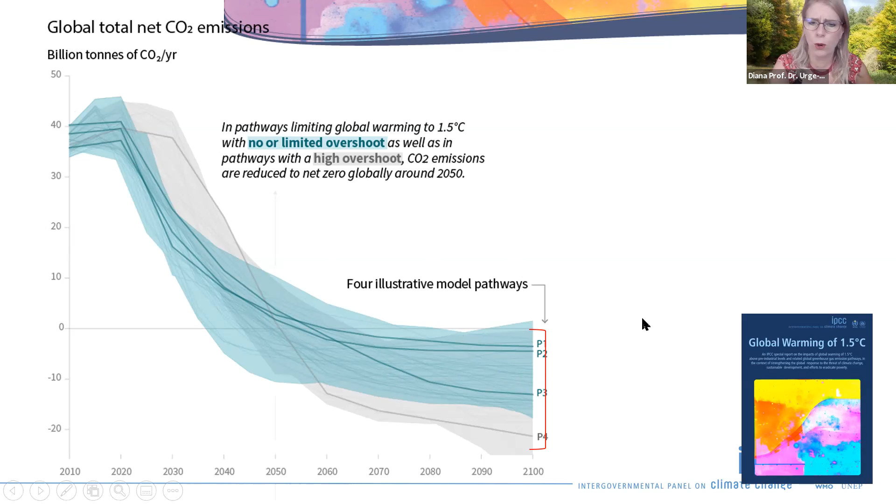Each line in this spaghetti diagram is one emission future. I want you to focus on P1 and P4, but first let's zoom in on P4 - what does it actually look like if we decompose it? The gray is the fossil energy related emissions, orange is agriculture, forestry and land use related emissions, and yellow is BECCS, bioenergy combined with carbon capture and storage.

The problem is there's major concern in recent scientific literature about scenarios so heavily relying on BECCS, because it has issues with biodiversity - ecological concerns - but also costs and many other issues. But if nothing else, just look at the intergenerational justice issue: basically we continue to have fun now while we delegate all these costs to our children, because BECCS has nothing else but costs - it's going to be very costly to capture carbon dioxide from the atmosphere and store it permanently. It doesn't really have much else to offer.

As opposed to that, scientists were asking: can we do something else, not use so much BECCS? And yes, there are alternatives, but not many scenarios out there meet the stringent climate conditions without this enormous amount of BECCS. But definitely what you see is the big difference between the two is basically a free fall in energy demand - not only emissions, but energy demand.

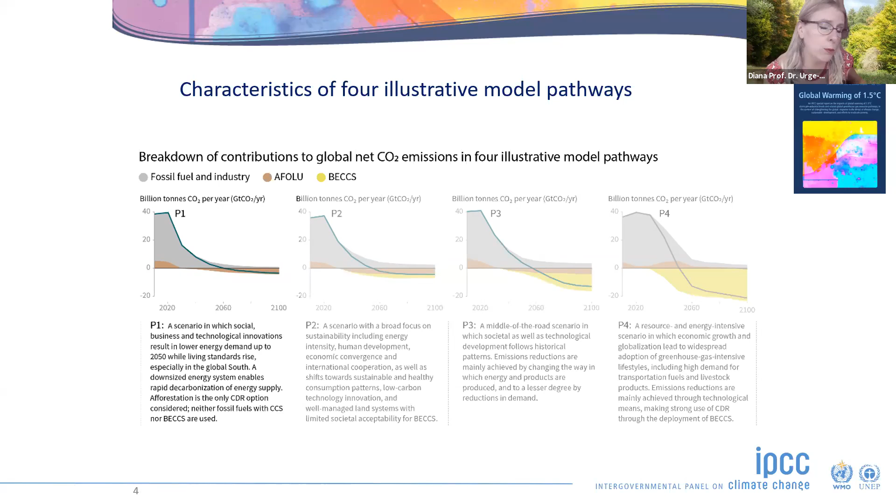So meaning that we cannot meet stringent climate goals without controversial technologies, unless with a very strict and very high attention to efficiency and to energy demand decrease. And we know that buildings, and especially heating and cooling in the EU, is key to this, since half of our final energy use in the EU is for heating and cooling.

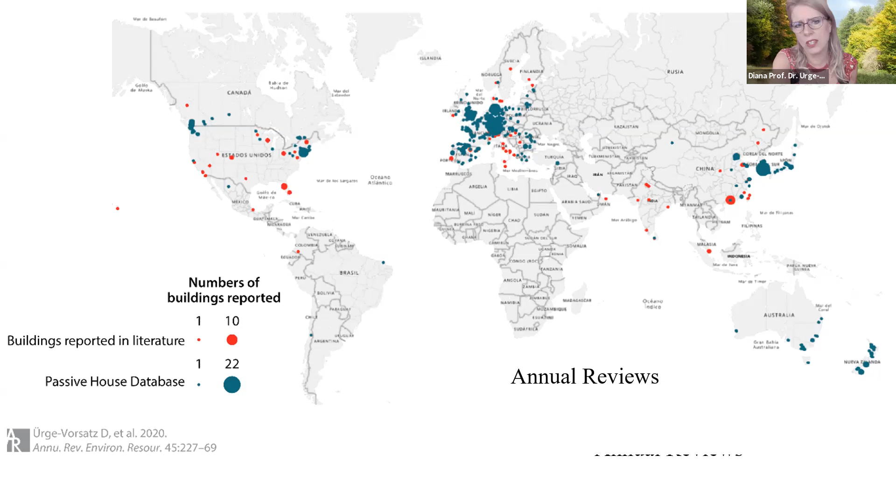The only exception we found, where we have not found yet fully net zero buildings, were commercial buildings, so high-rise office buildings, in hot and humid climates, where a lot of the energy demand is not only for cooling, but for dehumidification, and that has a very large energy requirement, and there it's much harder to do net zero energy buildings. But in all the rest of the world, although unfortunately there are not many examples yet in Africa, based on experiences in similar climates, it's feasible.

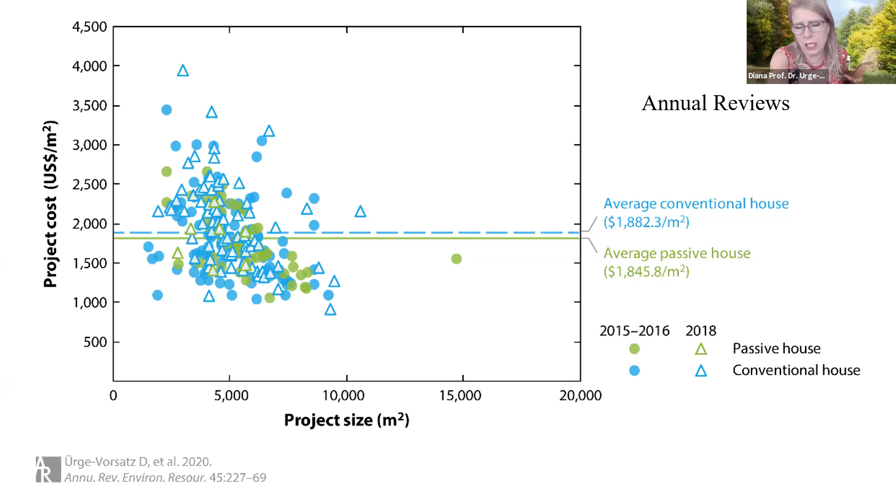But what we also concluded is that it's also actually cost effective. Unfortunately, it's not very easy to find scientifically valid evidence for this. But for example, this is the figure that we used in the paper. These are the costs for conventional houses in the same area of Philadelphia, same time period, and the researchers found that the passive houses were in fact cheaper than the average conventional house. Of course, there is a huge spread of costs, but the point is that on average, you cannot distinguish. So for newly built, you can definitely do it in the cost range of new conventional buildings, and where there were studies we found the same.

But what we see, sorry, I don't know why the line disappears. Anyway, the point is that there should be a line.

Yeah, it disappears. But anyway, so what we show is that, yes, you can always make everything very expensive, especially in construction. If you do major retrofits, often you don't only retrofit energetically, but you also upgrade the facade, you make things nicer, you put different new tiles and stuff like that. So you can make it expensive.

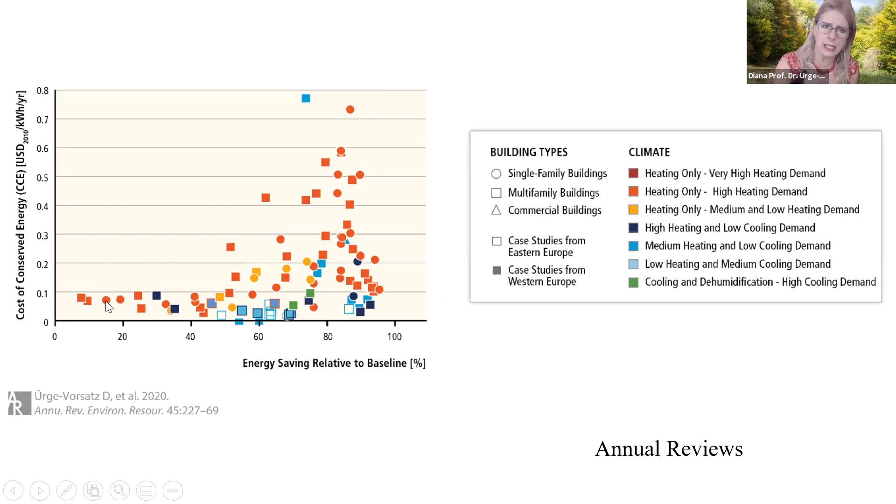And I have to admit that here I have made one of the biggest scientific mistakes of my life, because originally I was trying to study in which world regions and which building types you can do net zero energy buildings and in which you can't. It was also helped by Ksenia Petrichenko's dissertation, which she, I believe, did present at eceee. And there we concluded that this building type is where it's impossible, in places where there's not a lot of solar energy, and we are talking about high-rise buildings and commercial buildings.

Now, fortunately, if you look at the numbers, I wasn't that stupid to say that, because for this particular example, before renovation, it consumed 800 kilowatt hours per square meter per year. A typical new office building in Vienna is about 450 kilowatt hours per year. And however well you look, you cannot do more than about 60 kilowatt hours of photovoltaic energy per square meter per year. So that means there is quite a big mismatch. So I perhaps wasn't that stupid to say that this is not possible.

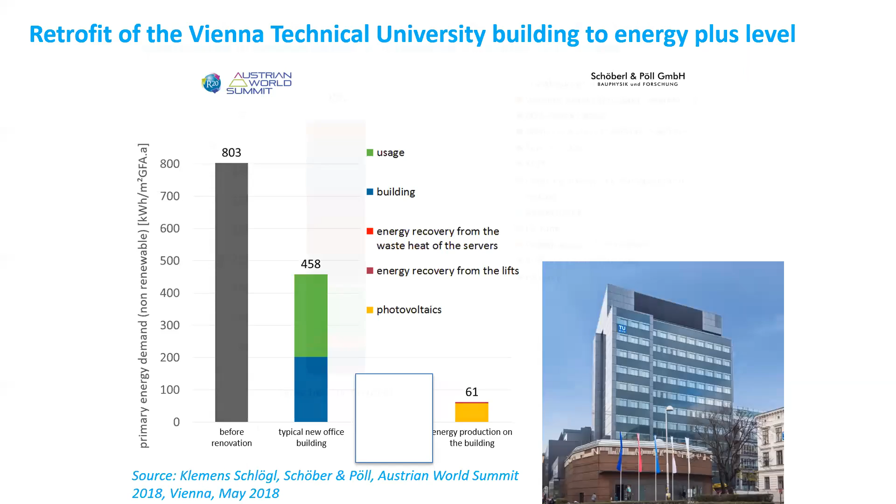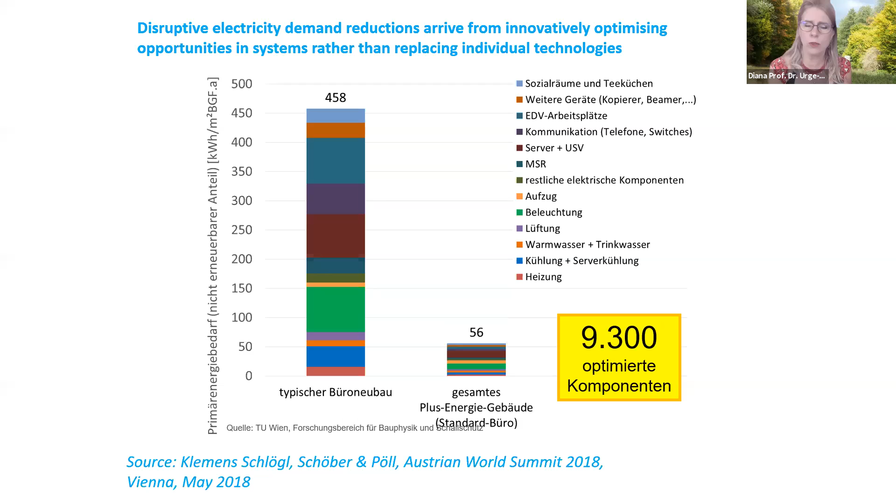But fortunately, there are more stupid people than I am who just go for the crazy, and this is what they have done. This is the typical new office building and energy consumption; this is in German, but the details don't matter. Really, the point is that it's all the different types of electricity used in the building. So what they have done is that they have optimized 9,300 components. And as a result, they have reduced the building energy demand by 9/10, to 1/10 of the original power demand.

Most of our studies never really dare saying that you can reduce commercial building plug loads by 9/10, by 90%. But they didn't only study that, they implemented it. This is what has happened. And we are doing the same now for the CEU's new building complex in Vienna. We are also trying to reduce the energy demand by that much, by 9/10.

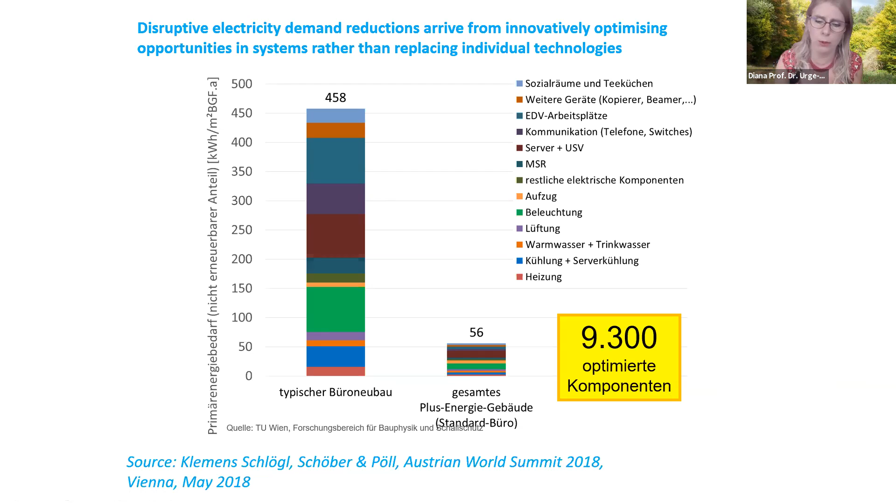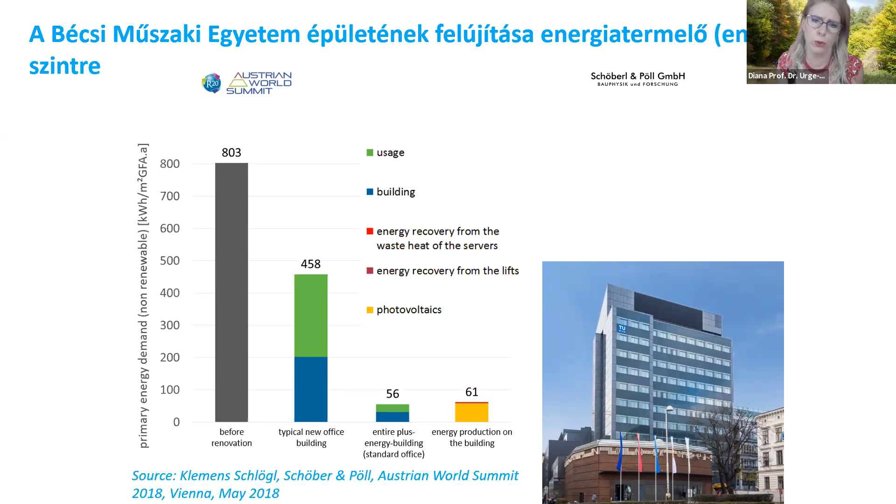But this means that there is no silver bullet, but you really have to have a very, very detailed understanding of the energy use of the people, of the buildings, of the components, of the technologies, and only then you are able to achieve this major reduction. So the key point in the paper that we illustrated by this example, but also provided other evidence for, is that the key to net zero energy buildings is actually energy efficiency. So bringing down the energy demand of the building users, not only heating and cooling, but all energy demand in the building. If you bring it down, then it is much more possible to do net zero energy buildings.

So, as a final point, the problem is that we are not doing this. There is, for example, now the renovation wave in Europe. There is a lot of money now under the economic stimulus packages for different construction projects, infrastructure projects, building projects. But every single building which we are building from today and that we are retrofitting from today to less than a net zero level locks us into a higher temperature future.

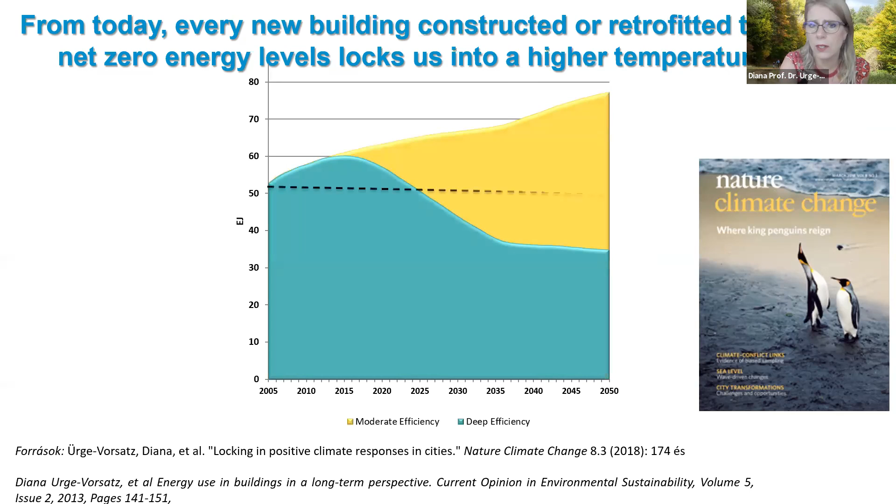Why? So this is the study that we have done and published in Nature Climate Change, among others, and there are other references at the bottom of the slide. Basically what we are showing is, if you compare a moderately ambitious building energy scenario globally, because it doesn't increase as much as business as usual, to a more ambitious one, and this is not yet the most ambitious, because this is our older research. We are updating these numbers now, and Souran presented our new numbers yesterday.

So, but still, even based on the much earlier technologies where we could not yet do such good net zero energy buildings, even then we are locking in 80% of 2005 total global building energy use by not doing good buildings, because any time we reduce building energy consumption just by 20, 30, even 50%, you're locking in the remaining 30, 40, 50% that could be saved, because then it's going to be too expensive to go back for this. But by 2040, 2050, we will need that reduction potential as well.

Now we can still do it. We can still meet climate goals, because it's okay to reduce 30, 40%, but when we have to reduce 80, 90% or 100%, we will need that potential, but it's going to be extremely expensive or impossible to go back for that.

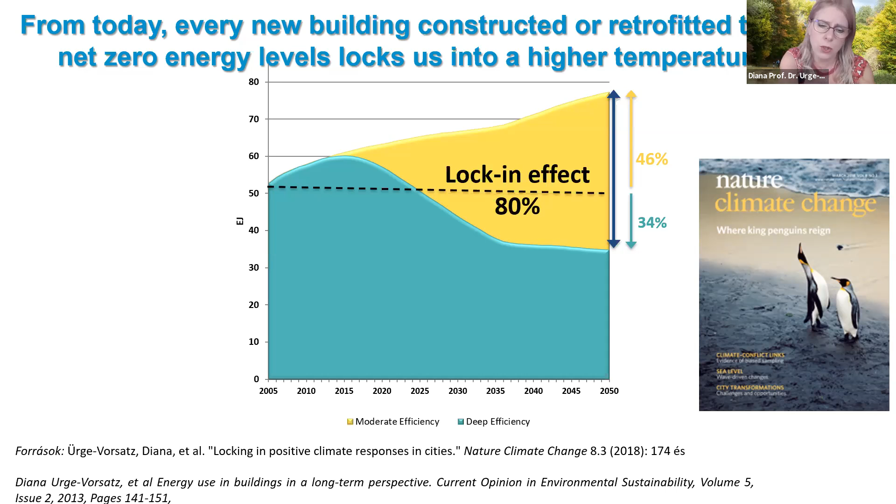So really, it's crucial that from today, every new building that we build, or every building that we renovate, tends to be net zero. And we have shown that this is all cost effective, and this is not rocket science and available everywhere. So let's not let a good crisis go to waste.

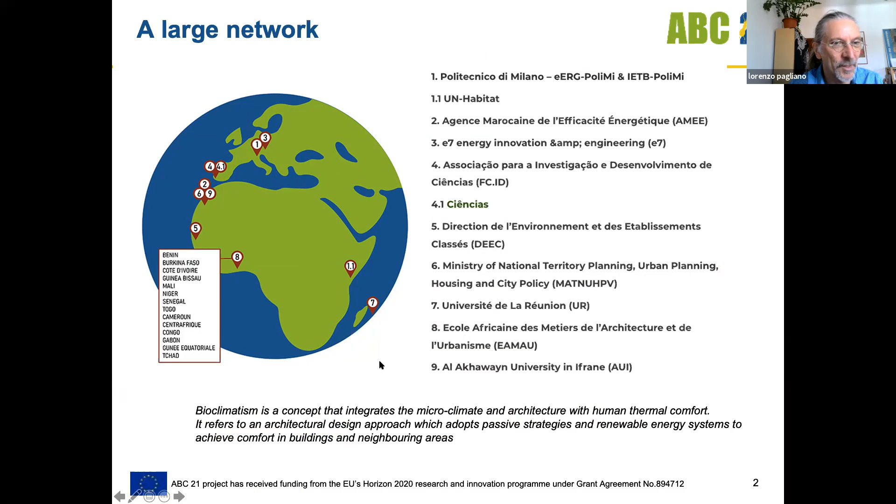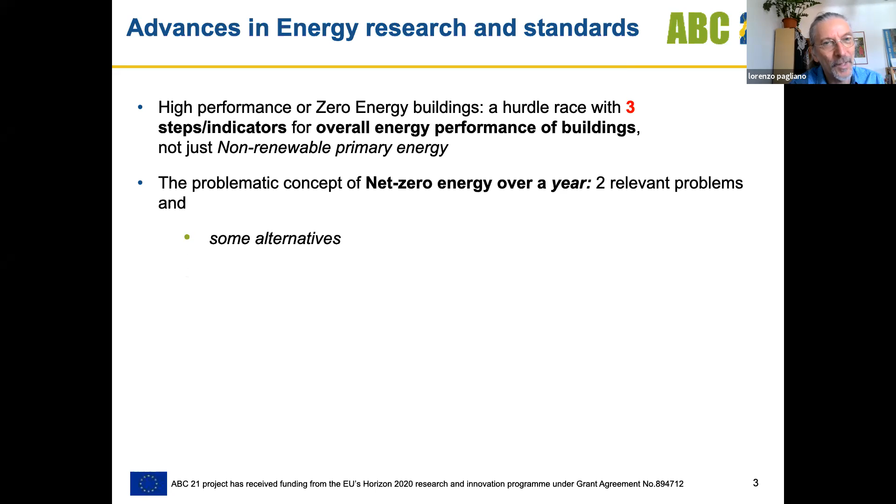Energy, what we have found recently: so these high performance or zero energy buildings, the recent research and the standards tell us that the best way to qualify them is with 3 indicators, not just one. There is this net zero energy concept over a year, which has some problems. Diana already indicated the good way to solve these problems, but I will come back to that. And implications for policy, possibly in our discussion.

So we try, throughout the project and this presentation, to use one language to be able to communicate effectively, and that's the language of the ISO 52000, where there is a common set of terms and definitions about energy performance of buildings, which can be seen also online, not only in the standard, which is not so easily accessible, at this site. So all the definitions are there in English and French.

And we start with exactly what Diana was saying, reduce demand, and how can we define very well physically this demand. In the standard, this has a name, which is energy need for cooling, for example, which is the heat to be extracted from the thermally conditioned space. Let's imagine this room: it is the energy we have to extract from the air contained in this room to keep it in a certain temperature condition, or more generally in a certain comfort scenario condition.

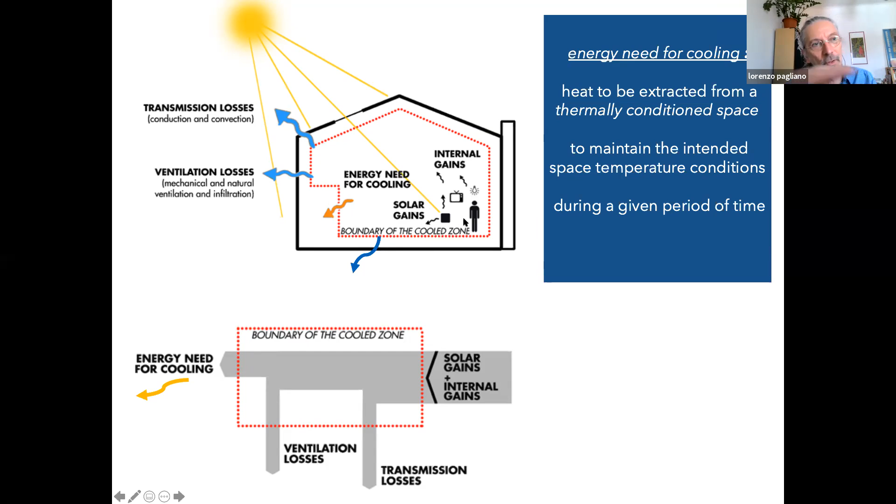And obviously this is a physical quantity which depends on how much energy is entering the building, solar gains, internal gains, and how much energy is leaving the building via transmission losses through the walls, to the ground. For example, in a hot climate, maybe we want to lose some energy via the ground, or via ventilation at night and so on. And so the difference between these gains and the losses is the remaining energy need for cooling, the energy that we have to extract actively or with some passive device, but anyway, with systems that will extract this energy to keep the temperature or the conditions stable.

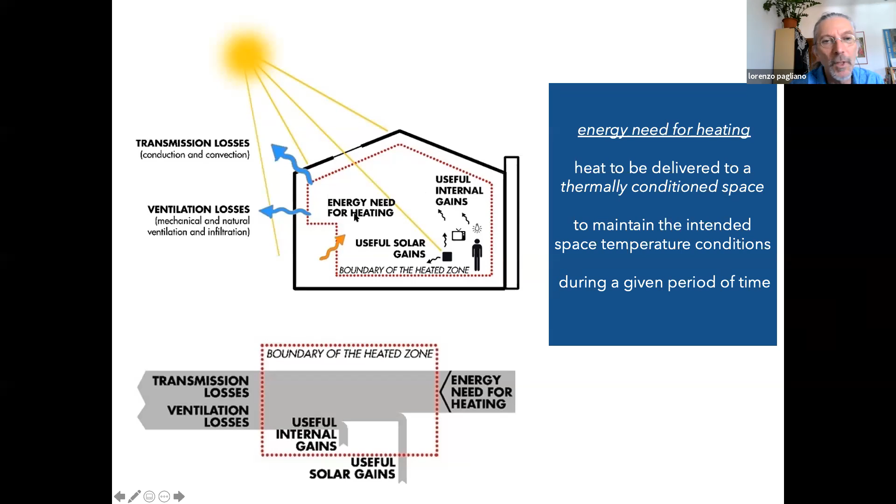The same for the energy need for heating, and we insist on these two terms because this is the heat to be delivered to this space to keep it at a certain condition of temperature or comfort. And again, it is a difference between, in this case, the losses towards the cold environment in winter. Part of these losses are compensated by solar gains, by internal gains, but part might need to be delivered by a heating system. And this is called the energy need for heating.

And this is this red boundary here, the air within the room. Then we have the systems delivering this energy need, maybe a boiler, a storage, a radiator, a solar panel bringing energy there, gas bringing energy to the boiler.

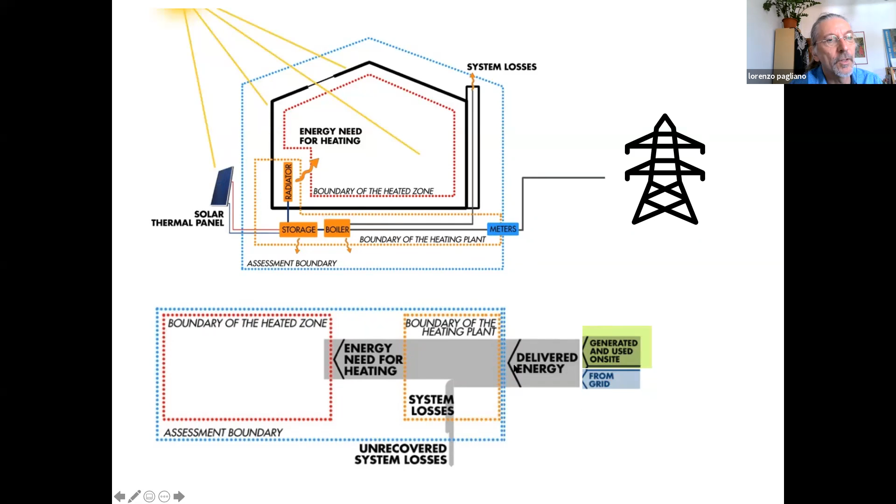So to obtain this energy need for heating, we use what is called delivered energy, which goes to the meter. It can be energy coming from renewable energy at the site or from the grid. The total entering the building, the systems of the building, is called delivered energy.

And then we finally have this primary energy, where we multiply the delivered energy, which is part fossil and part renewable, by factors that take into account the losses from the source to the boundary of the building. And so we get total primary energy if we consider the sum of all delivered energy, renewable and non-renewable flows, and we multiply each of them by their respective factor, which takes account of the losses.

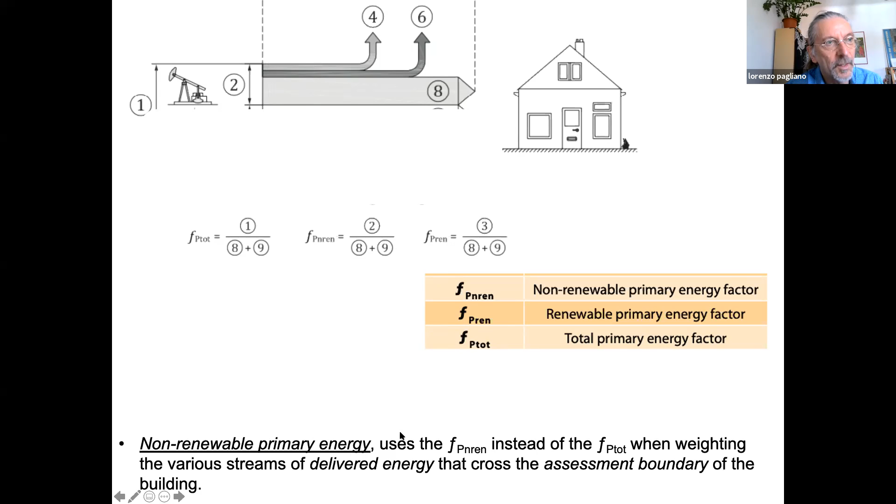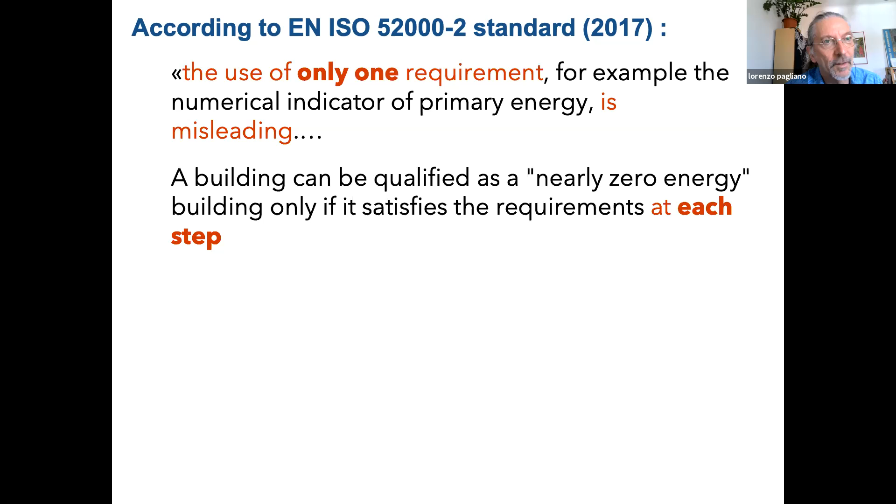If then we consider the non-renewable part of these flows, and we multiply that taking into account the losses, then we have what is called non-renewable primary energy. So we have these indicators, and sometimes buildings are qualified using only one indicator, but that's a very incomplete way. The standard says using only one requirement is misleading, not only insufficient. And we need to have 3 indicators and fulfill each of them.

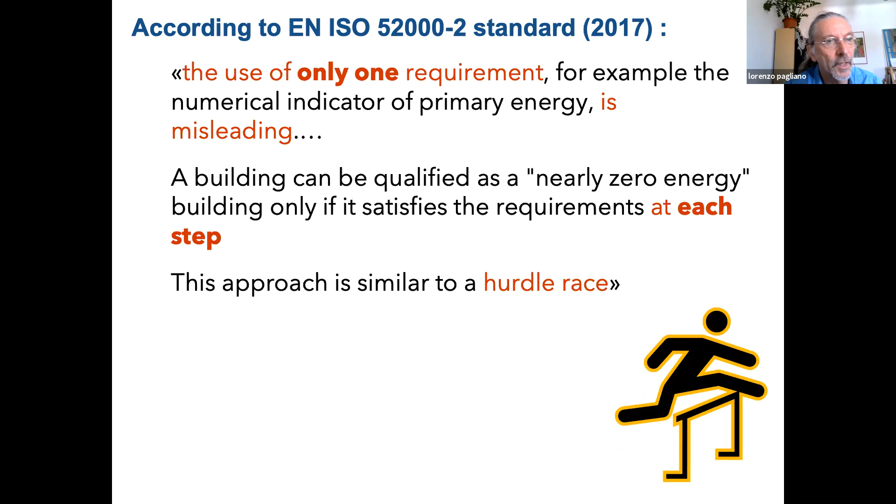It's a sort of hurdle race where we have to overcome 3 obstacles, which are the energy need for heating and cooling, which describes the thermal envelope and the heat recovery on ventilation. And these, as Diana was showing, can be highly reduced. This demand for energy can be reduced by 80–90%, for example, the use for heating and cooling in new buildings, in retrofitted buildings. And that's the first hurdle that we overcome, and the biggest one, the one where we can make a difference.

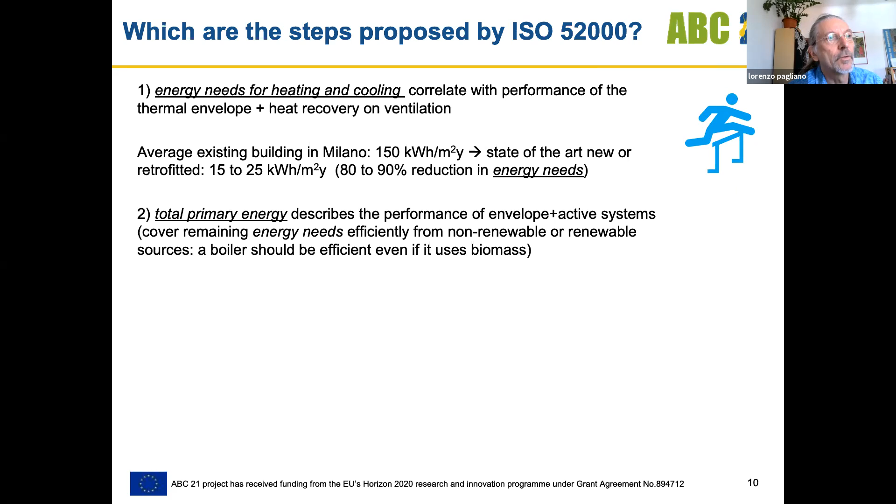Total primary energy describes how the active systems use fossil or renewables efficiently or inefficiently, and a low total primary energy is a second step to achieve, and then a low non-renewable primary energy, so a low part of primary energy coming from fossil, is the third thing to do.

And so we can say the energy efficiency first principle is telling us to make as low as possible the energy needs, first of all, and the total primary energy. And the objective of increasing the share of renewables is achieved if we can reduce the indicator non-renewable energy.

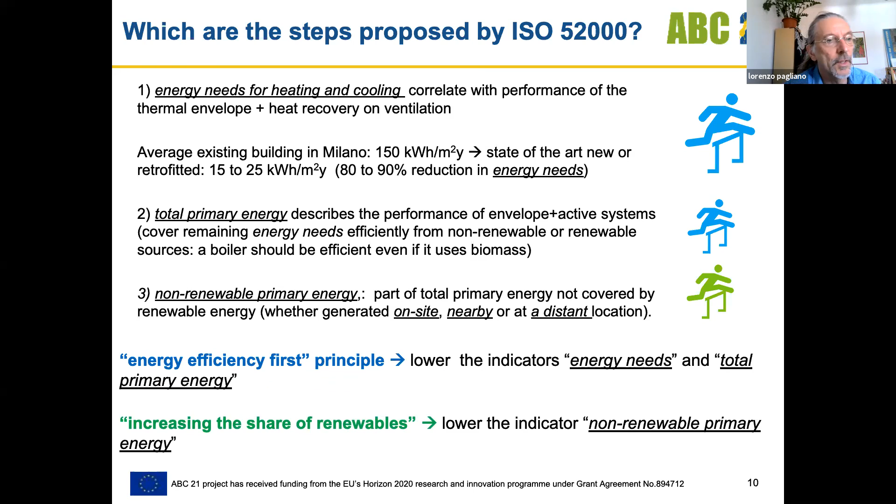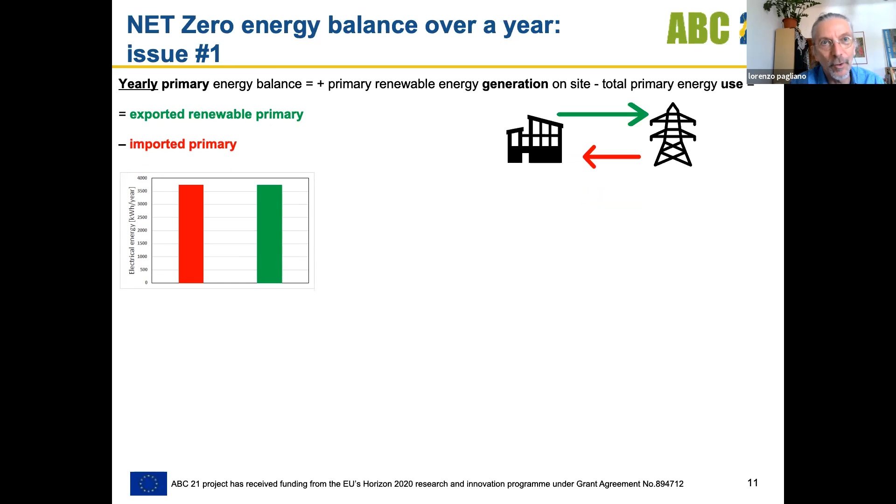Sometimes these objectives are expressed through this net zero energy balance over a year, which can be described as exported renewable primary minus imported primary to the building. So we could say, okay, over a year, we import from the grid as much as we export of renewables to the grid. These two things balance out, and we have a zero energy use. And in this example, that's what we have over a year, which is a good goal.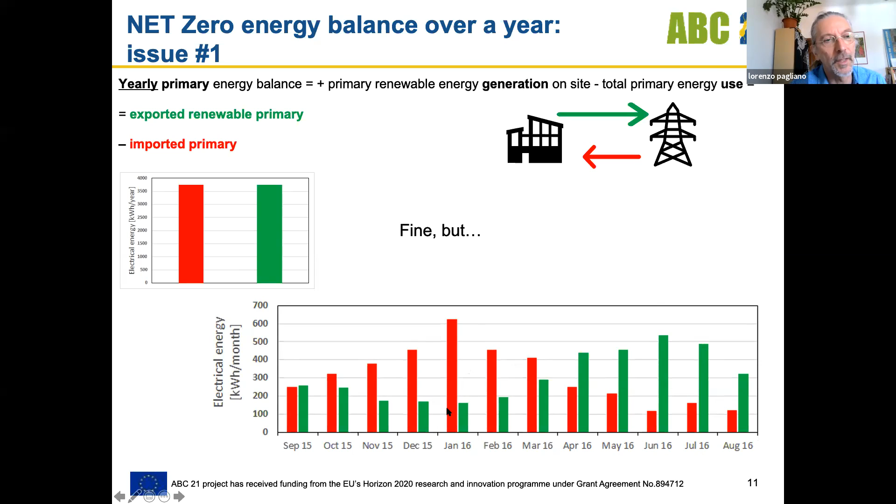But if we then look hour by hour, or in this case, month by month, we will see that if energy is generated by photovoltaic in Milano, we generate a lot of this green energy in summer and much less in winter, so we have more use in winter than production, and vice versa, which means that we still burn gas and emit CO2 in winter.

And if we do this balance where we say, okay, but the total is zero, we are assuming that the photovoltaic which I export to the grid in summer will be available for me in winter for free, with no losses due to having been stored for 6 months. This is obviously physically not true. Interseasonal storage costs materials, embodied energy, and energy losses.

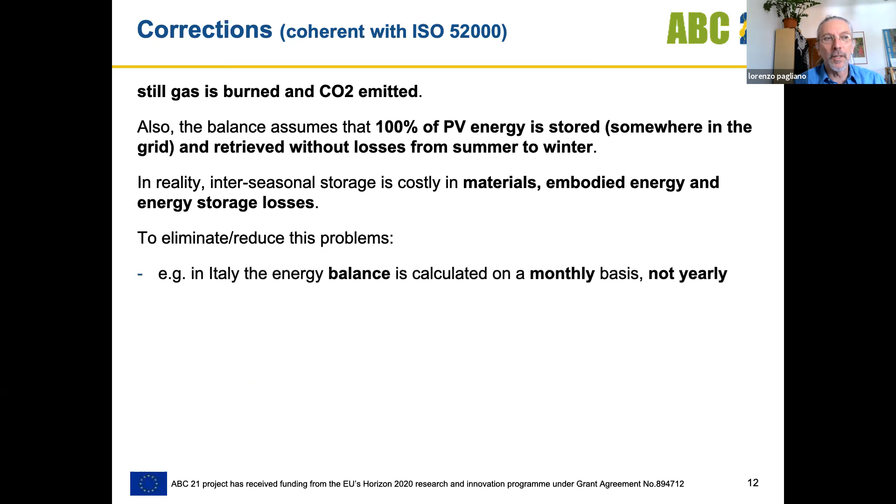So we should try to reduce this problem by regulation. For example, the energy balance in Italy is calculated on a monthly basis, not on a yearly basis. So you can't offset your overconsumption of winter with the overproduction of summer.

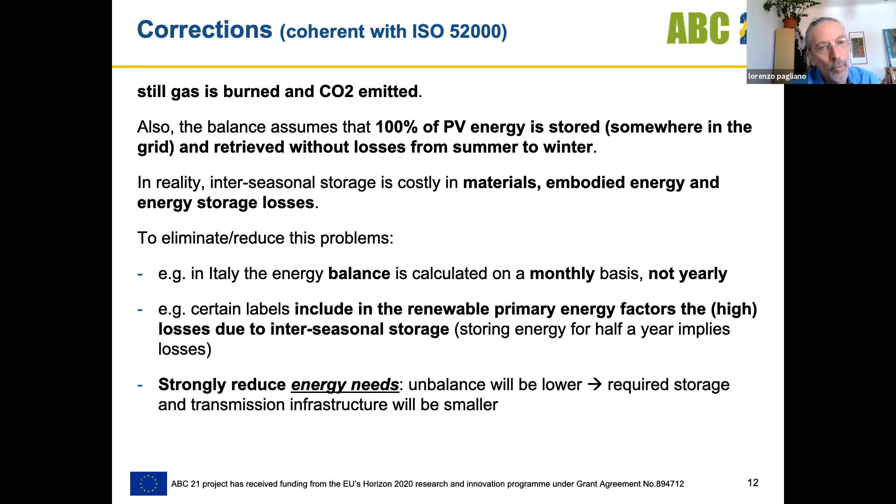We could calculate the renewable primary energy factor, including the losses, while in the trivial way to do this balance, the losses are simply ignored. But obviously the big way to do it is physical. If we reduce the energy needs, if we have a very low demand, also the imbalance between one hour and the next, and the imbalance between summer and winter will be reduced by a factor of 10, so reducing the requirements for storage and transmission infrastructure.

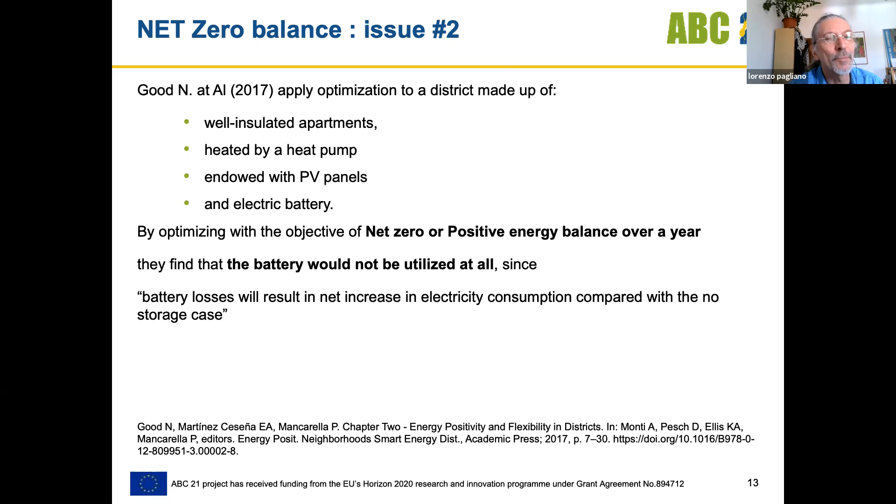There is another issue with this zero energy balance. Here it's a case of a village with well-insulated buildings, heat pumps, PV, battery, optimizing it for net zero energy. The researchers find that the optimization doesn't use the battery at all, because using the battery means having losses of storage. You store, you recover, you don't recover 100%. So in terms of this balance, it's much better to sell to the grid, where the losses magically disappear in this accounting.

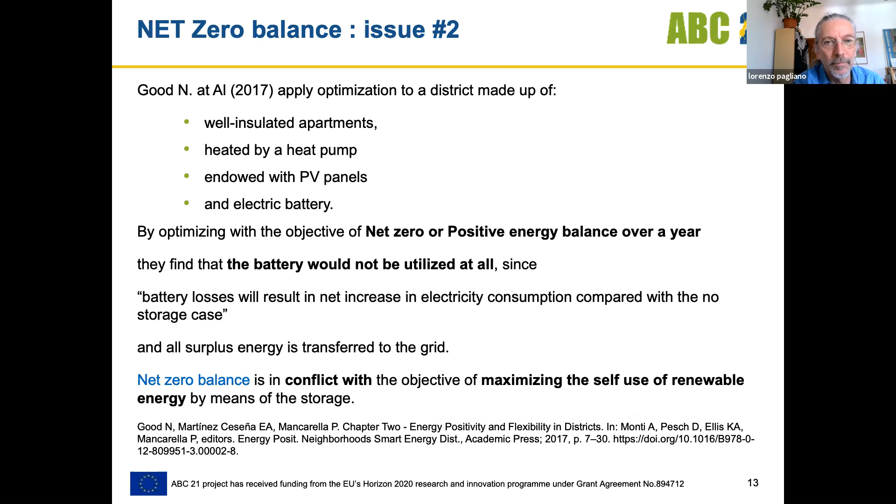So in this sense, net zero as a mathematical objective is in conflict with maximizing the self-use of renewables using storage, and that's where Salvatore Carlucci, who is a professor from Cyprus Institute, comes in.

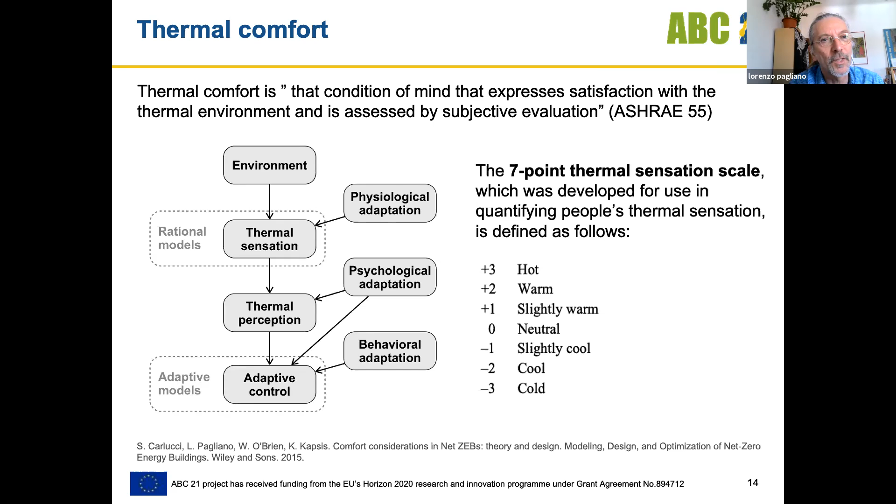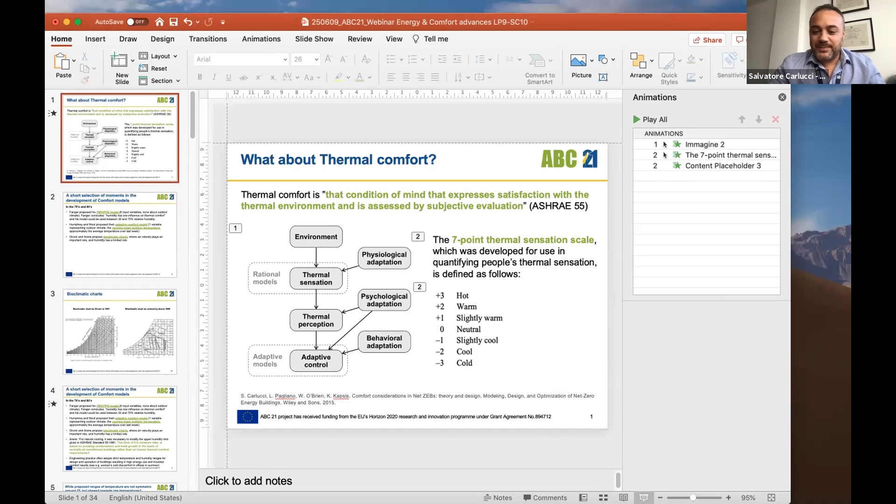I don't know, Salvatore, if you want to share your own screen or tell me if I use this presentation here. Thank you, Lorenzo. If possible, I share the other. Okay, so I unshare. Thank you. Floor is yours. Thank you for accepting this invitation to share with us. It's a big pleasure. Thank you really much, Lorenzo. Thank you, everybody, for being here this afternoon.

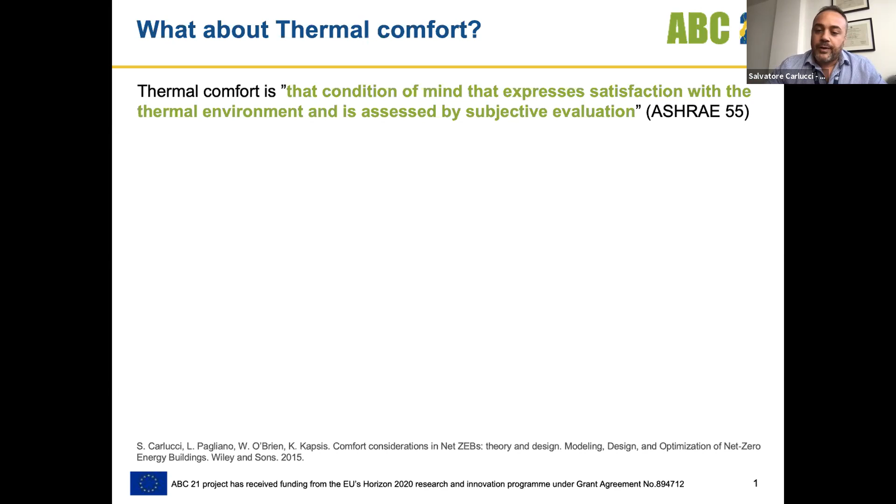So the second part of this chat was about comfort. So what is thermal comfort? There is a general definition that has been incorporated into standards for many years now, according to which thermal comfort is that condition of mind that expresses satisfaction with the thermal environment and is assessed by subjective evaluation. This is specifically the version of ASHRAE 55. But that is a quite, let's say, not physically bounded definition. There are terms like satisfaction, like subjective evaluation. How can this really help a physical design of net zero energy buildings?

There is a context in which the term thermal comfort is fitting. That is this kind of schematic where we consider the human body, each of us, exposed to some environmental condition, and what we perceive as a thermal sensation is basically the result of the reaction of our body. This is a physiological adaptation to the environmental condition. And there are some models developed in the past 50 years that have tried to quantify this effect in order to predict and assess thermal conditions in buildings affecting the human body. Then there is a second level, the thermal perception, how we perceive the thermal environment in which we are. In this case, we have a second lens to interpret the condition, due to our psychological reaction and adaptation to it.

Then there is another level, the adaptive control that we act in the building. It depends, of course, on the psychological adaptation, but also behavioral adaptation. So also what we are as social human beings might impact the way in which we interact with the building. Without going too much into the details, thermal sensation is quite interesting since it's quite easy to understand and is directly used for some of the assessments that we will see in a while. It is expressed typically on a 7-point thermal sensation scale.

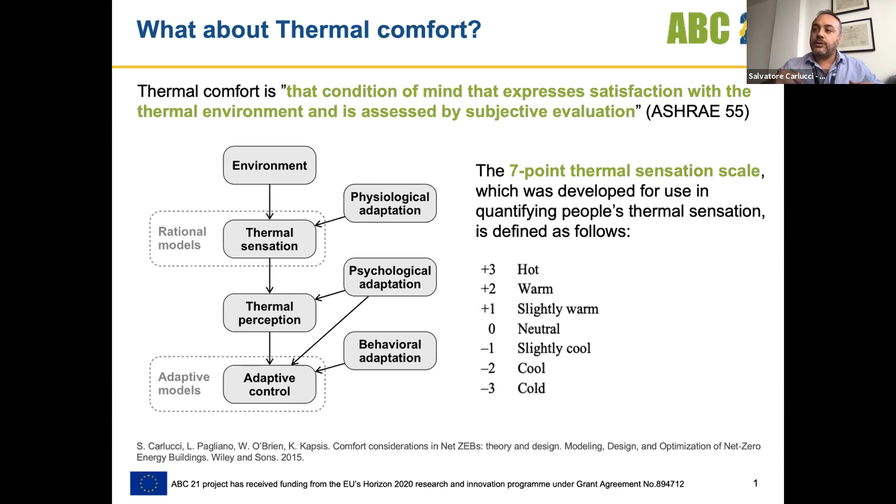Just a brief introduction about the evolution of thermal comfort. Everything started in the 60s, the models were framed in the 70s, and then in the 80s there was the strengthening of the concept. One of the most important and referenced models, in particular of this rational, energy balance based approach, is the Fanger model, also called the PMV-PPD model, where PMV stands for predicted mean vote, and PPD for predicted percentage of dissatisfied people.

It's a model that gets as input 6 variables, but none of them is related to the outdoor climate. That was one of the first criticisms that this model got. But this model was really accepted by the community and has been integrated into standards, still referred to until now.

It's very important to mention that Fanger, in the 70s, in the book Thermal Comfort, mentioned that humidity has a low influence on thermal comfort. This is extremely important to keep in mind also for assessment that we will discuss later.

One important element is that when Fanger presented the model, he stated that the model is reliable and can be used considering some ranges for the input variables. Relative to relative humidity, these ranges go from 30 to 70, so outside this range the model should not be applied. This became, possibly with time, considered like a sort of range where the model fits or comfort condition might be expressed. No, it's something different — this is a scope of the model.

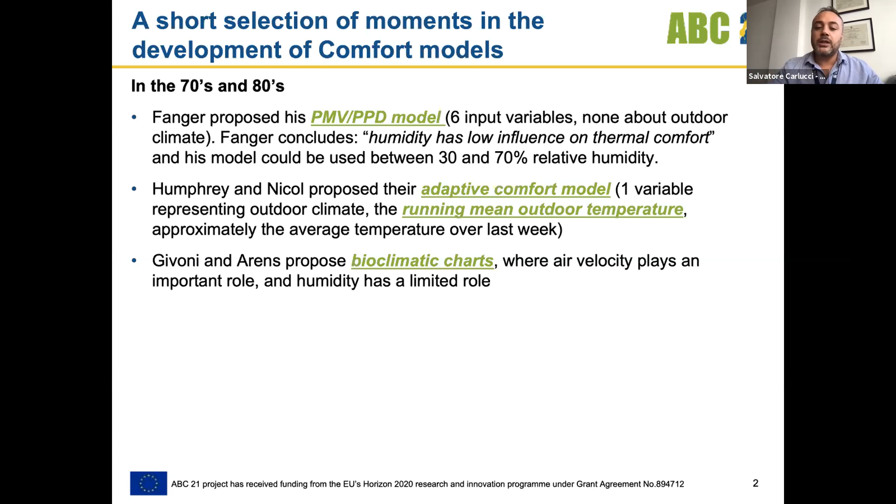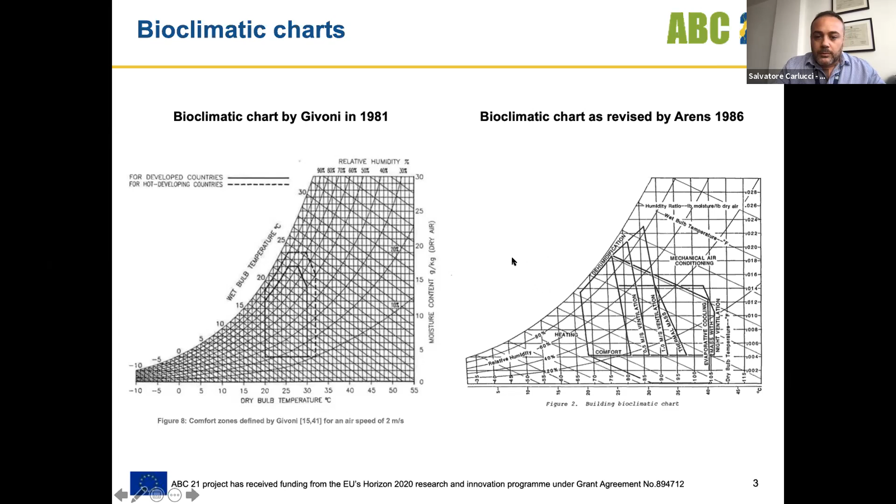It's also interesting to mention that Arens, now in the 80s, mentioned that for natural cooling it was necessary to modify the upper humidity level given in the ASHRAE standard. This is in 1981, and this is a number quite common in our community: 12 grams of vapor per kilogram of dry air. The justification was that this value is based on avoiding condensation and mold growth in the ducts of centrally air-conditioned buildings, rather than on human thermal comfort requirements. So again, this kind of threshold was present to solve a very important technical issue, and was in some ways extrapolated and used like a sort of threshold for thermal comfort application. That is not the case.

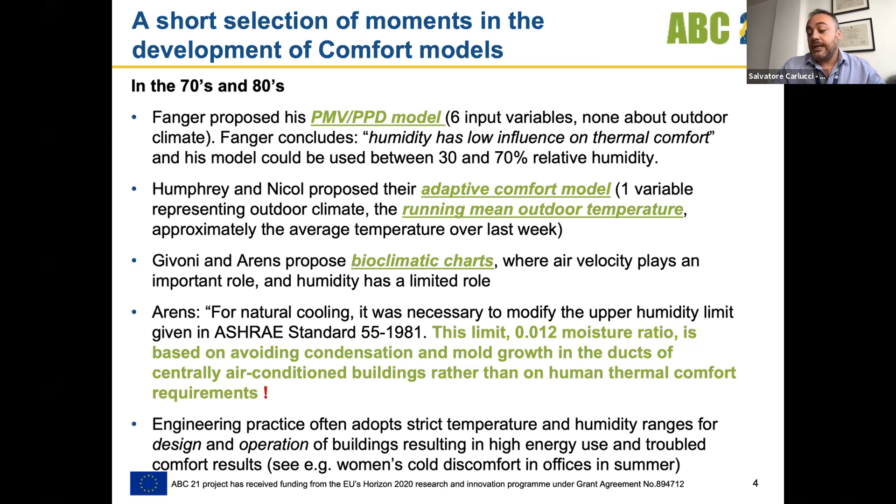Then engineering practice in the last decades has in some ways incorporated — and this is very good — thermal comfort models, sometimes approximating and simplifying them in a way that is not really aligned and comparable with the original indications of the main researchers. So, for example, this is a picture from a standard.

What we can see, without getting too much into the details, are the temperature ranges for the heating season and the cooling season, where the typical conditions for energy calculations are presented. For heating it's from 20 to 24, and for cooling from 23 to 26, giving the energy analyst the possibility to decide the threshold. So we could get into the paradox of choosing 23 degrees as set point for cooling, while the set point for heating might be 24.

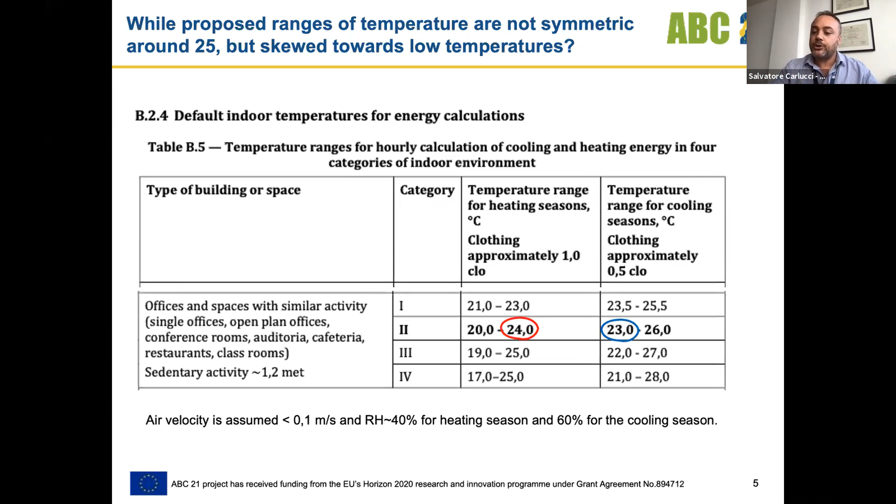That is quite crazy, but actually Ed Arens, again through an experimental campaign in California, demonstrated that on average these are the kinds of figures identified. Why? Sometimes we, as practitioners, mix up design, control, and assessment. These are completely different aspects that require different hypotheses and sometimes different assumptions. This is extremely important to keep in mind as well.

Going closer to our time, we are at the 21st century. Fanger in 2002 acknowledged that his model might suffer low predictive skills in real buildings, basically due to the fact that this model was developed in climate chambers, in laboratory studies, in particular in warm climates. He proposed corrective factors that could even expand the comfort range by a factor of 2, so you see how big the uncertainty becomes here.

Meanwhile, in the latest years, thanks to attempts like the European SCAT project and the ASHRAE RP-884, which brought the creation of the first ASHRAE Global Thermal Comfort Database #1, adaptive models were introduced. First integrated into ASHRAE 55 in 2004, and then the European one integrated into a standard in 2007. Recently, thanks to the thermal comfort community and annexes like Annex 69, a new ASHRAE Global Thermal Comfort Database has been released, incorporating even more data than before, representing the largest data source available on thermal comfort in the world, covering different types of buildings, thermal zones, and conditions.

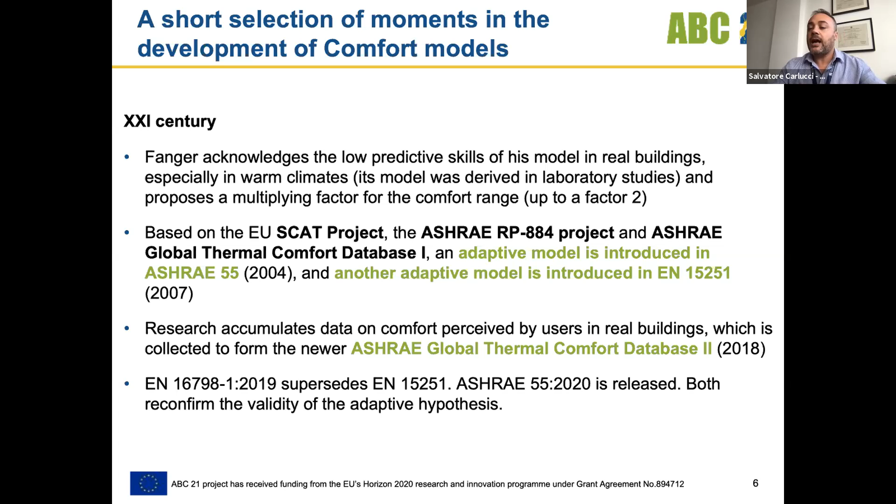Just to give you an overview, the first time that thermal comfort got integrated as a concept in a technical standard was in 1966 with ASHRAE 55. The latest revision of this set of standards on thermal comfort is in 2020. So it's about 50 years that we have been discussing thermal comfort.

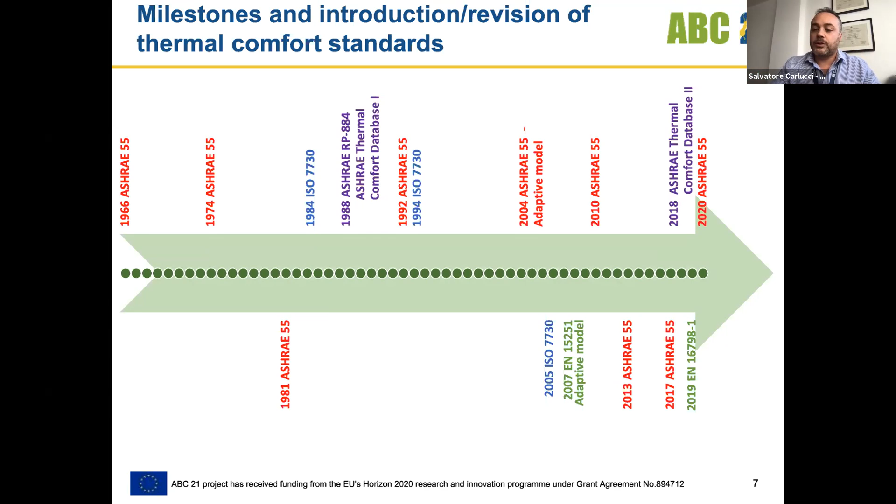Now, just to summarize a few key points that might be helpful for this discussion, we will refer to the latest version, the most updated one, that is ASHRAE 55 version 2020, which has some very important elements of novelty in its latest revision.

Just picking some elements, there are even more novelties, but basically the first element is that the applicability of the adaptive comfort model has been extended also to buildings that have mechanical cooling systems installed, as long as they are not in operation. Before, the adaptive comfort model was just limited to naturally ventilated buildings, as they were called.

Also, what is interesting, the second point here, is that the operating set points for buildings are not mandated. So there is not a table that says this is the reference value by this standard. We are moving towards that latest point: instead of specifying specific conditions, we can specify scenarios that the designer can meet, and this can give flexibility to adapt to specific conditions, site-specific or occupant-specific conditions.

Extremely important new element, the third point here: air velocity has been formally integrated, both modifying an analytic model with the introduction of this elevated airspeed comfort zone method, based on PMV plus the SET, the standard effective temperature, that is applied when the airspeed is higher than 0.2 meters per second. And it's also in some ways integrated and added to the adaptive comfort model. We will see that in a moment.

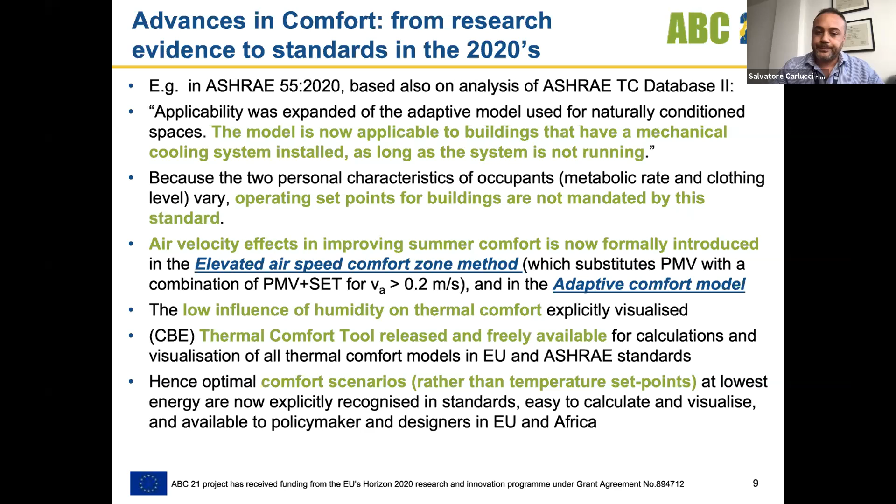This is just the analytical comfort zone method based on the PMV PPD, the Fanger comfort model that is represented in normative appendix B.

We have compliance with the model if the PMV predicted mean vote falls within this range between minus and plus 0.5. This thermal comfort tool can model all these and cover all these models.

What we have to keep in mind when we want to apply this model is that the metabolic rate of occupants has to be between 1 and 2 MET, and the average airspeed has to be lower than 0.2. Then this model will ask for some additional verification based on local thermal discomfort.

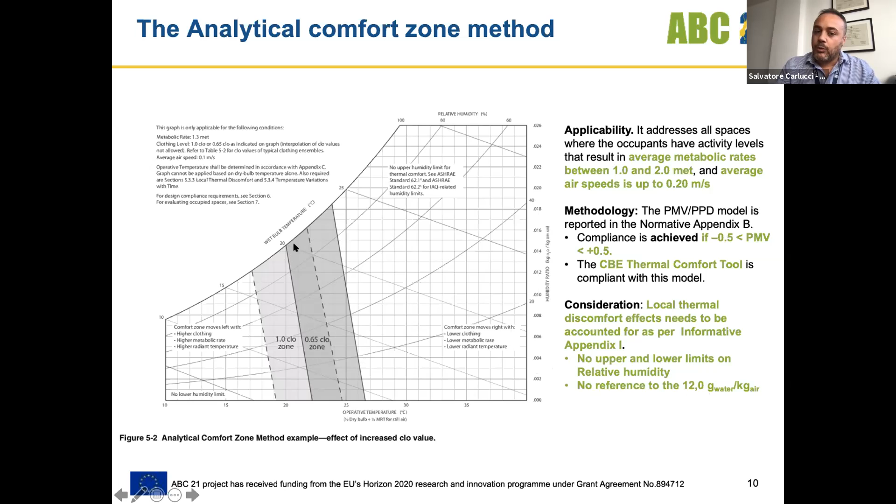The elevated airspeed comfort zone method is an analytical tool based on coupling the PMV plus the SET model, and basically provides additional information on the thermal comfort zone for airspeed higher than 0.2.

What is really interesting is that we could be in comfort for SET that might reach even temperatures in the range of 30, 31 degrees with airspeed in the order of 1.2 meters per second. This is extremely important. This changes the way in which we deal with comfort in this case.

We should also consider whether we have or not the capacity of controlling the airspeed. In order to achieve this condition, we need to provide users the possibility to directly control them.

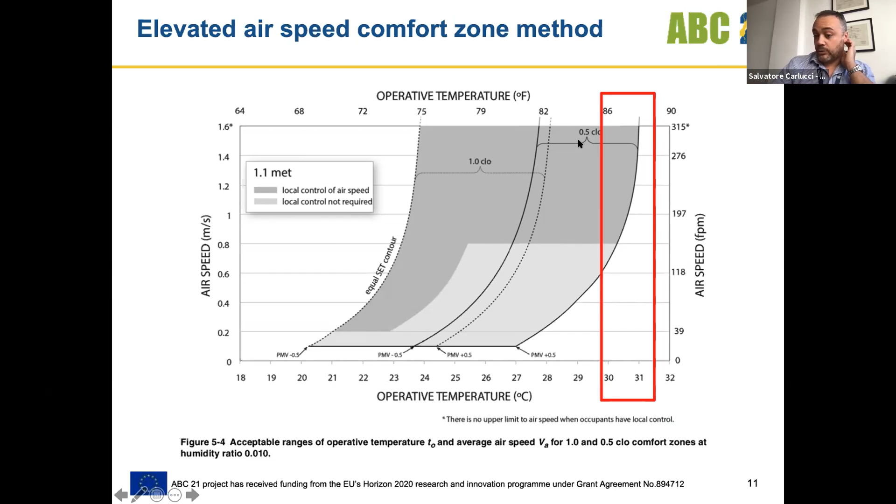I would like to challenge you to look at this and compare it with the previous table. It's very much different, the kind of condition that we can represent.

Dottore, they are telling me that we are till 4:15, so we need to leave some space for some discussion. But okay, I'll go to conclusion. Thank you very much, very clear. I'm in a few minutes.

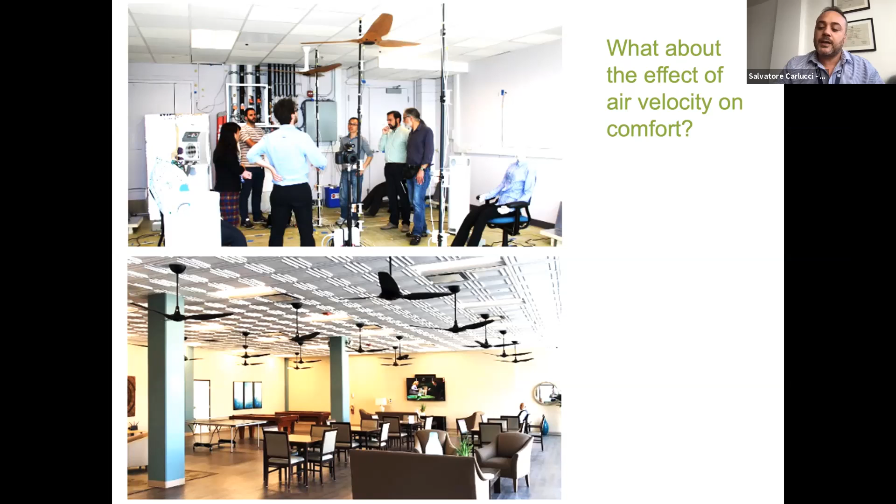What that means is that installing, for example, ceiling fans can be very effective in increasing airspeed. There are tools that can help us in designing these solutions.

For elevated airspeed, you see here the impact of moving from 0.1 meter per second to 0.5, which is not extreme airspeed. We have an increase, a shift of the comfort range by at least 3 degrees.

Again, the influence of humidity is quite small. It's just the slope of this line that is here presented.

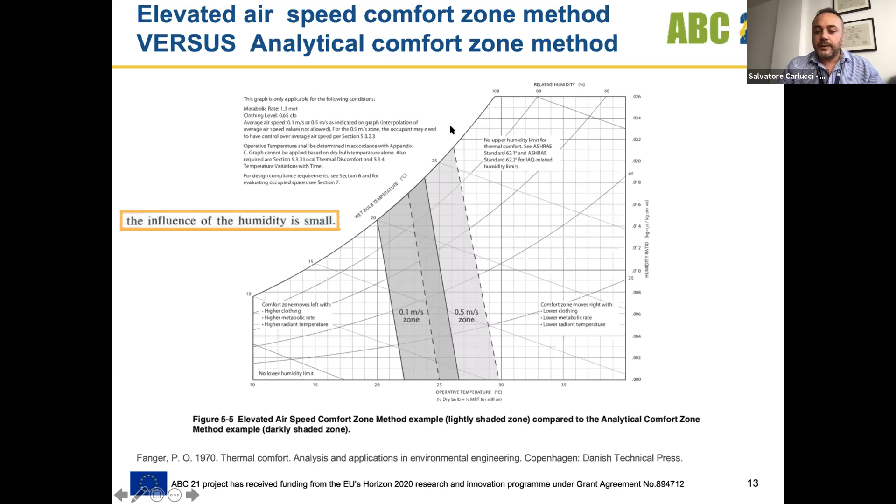The adaptive model: here the input is the prevailing mean outdoor air temperature, then we get the optimal condition.

What is really important is that now we could consider under the scope of this standard also buildings that have mechanically cooling and heating systems, but they are not in operation under this specific model. But people have to be free to adapt their clothing, so no dress code or things like that.

Another important change is in the reference comfort conditions, which is now the 80% acceptability class, while the 90% that we brought from the past is now just for information purposes, and in case a higher standard of thermal comfort is desired, even if in the literature this is not always the case.

Other important elements: local thermal discomfort, clothing insulation, metabolic rate, humidity and airspeed, are in this case already included into the model.

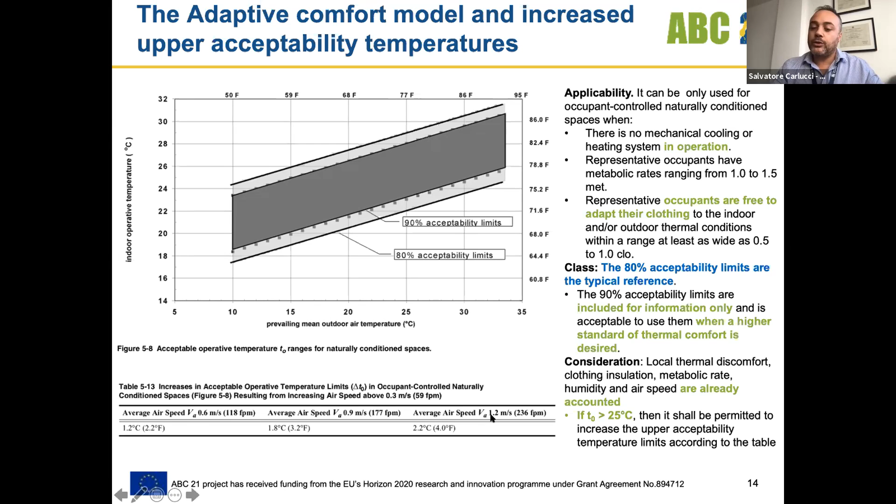But the novelty is that for operative temperatures higher than 25 degrees, we can add a correction factor. We can expand the upper acceptability temperature by some degrees according to the velocity: 0.6 expands it by 1.2, up to 2.2 degrees for 1.2 meters per second airspeed.

And then please, Lorenzo, if you want to take the... I'm thinking of skipping these examples.

So these are examples of use of the tool. It's really a very good tool that the university group has generated. As colleagues with which we have been working on the database, etc., they are doing very good work on this. Maybe you go on, Salvatore, just to the next one.

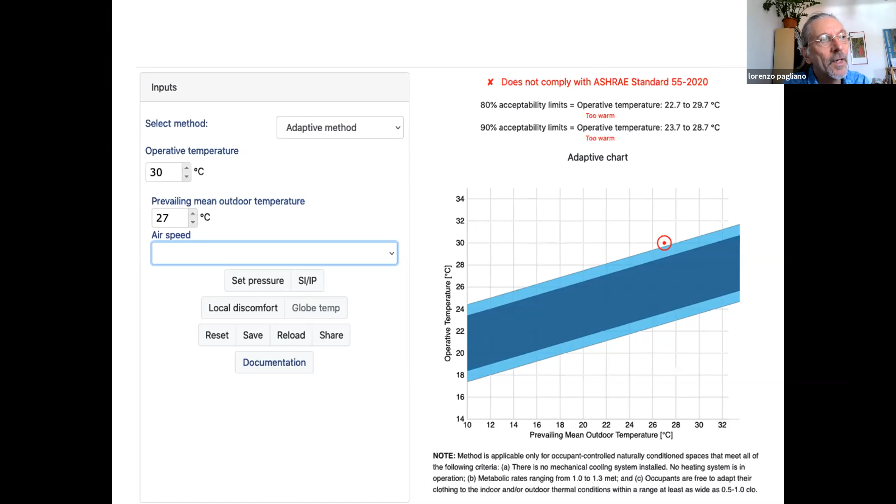So we see, for example, the velocity correction applied to the adaptive model, which brings into comfort what was previously out of comfort, this 27-point-something degree Celsius condition. Go on.

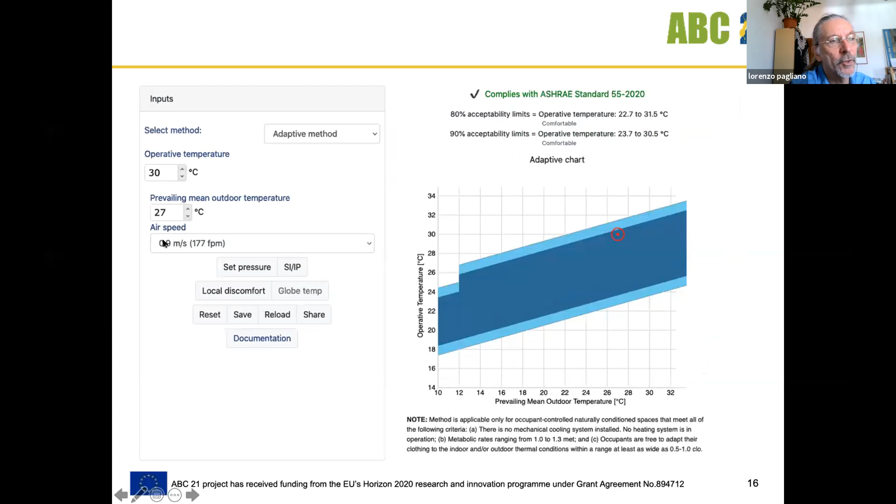And increasing air velocity, the comfort zone expands towards the higher temperatures. And you see directly how the comfort zone changes by changing air velocity and your condition fits into the comfort zone.

There is a lot to do, and today is an introduction to see how these concepts and this clear language that the standards offer, this clear description of comfort, can possibly be used in our search for good solutions with the colleagues from many countries, from Africa, from Europe, within the project, but also how to intervene so that this clarity that we have now available can be incorporated into the policy documents that are under preparation in Europe and in Africa.

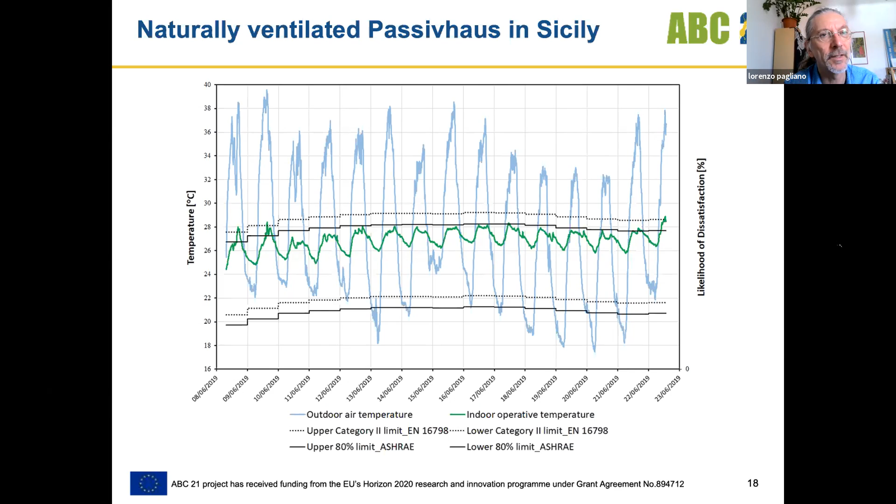Geo-sourced and bio-sourced and so on. We will have specific workshops on materials, another workshop on policy, a workshop on future weather files to take into account the evolution of weather for the future.